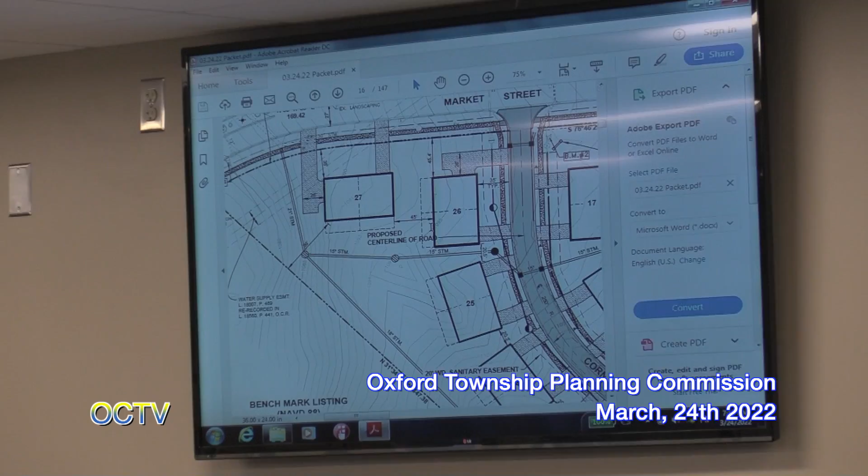Now if it's a patio, that'd be different, because a patio is a landscape feature on the ground. But if it's a deck and it's in the air, depending on the elevation, didn't we discuss that this elevation might make this into a patio? And there shouldn't be a problem if it's a patio. That's what I recollect, and that's what I recall. I believe it was only this building, wasn't it?

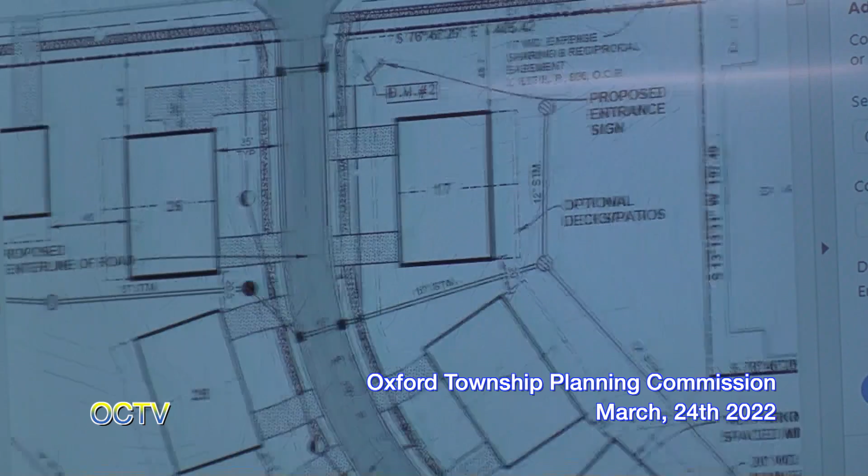Was there another one? Let me see, I just lost it, I can't remember. Buildings 17, 18, 19, 20, and 26. Right here, this part right here? Yeah, so in that case, the minimum spacing side to side is 20 feet.

So here, if you continued both decks following those lines, they would be within 20 feet, but it would be possible to do a partial deck or an angle. They might even angle a deck 45 degrees off at a corner or something like that and make it work.

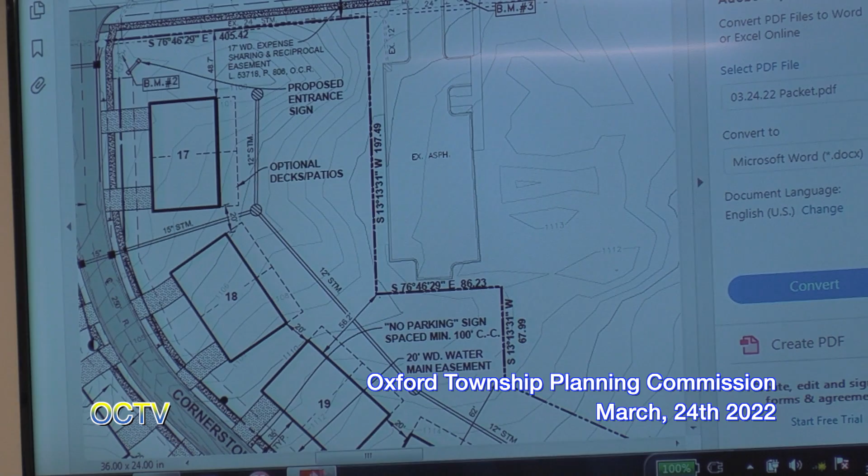I really think the only one that was really difficult was back when we looked at the other one - that was the biggest challenge. The others, right here at building 26 - I don't think we had problems with any others. I can try to check, but that's a good question.

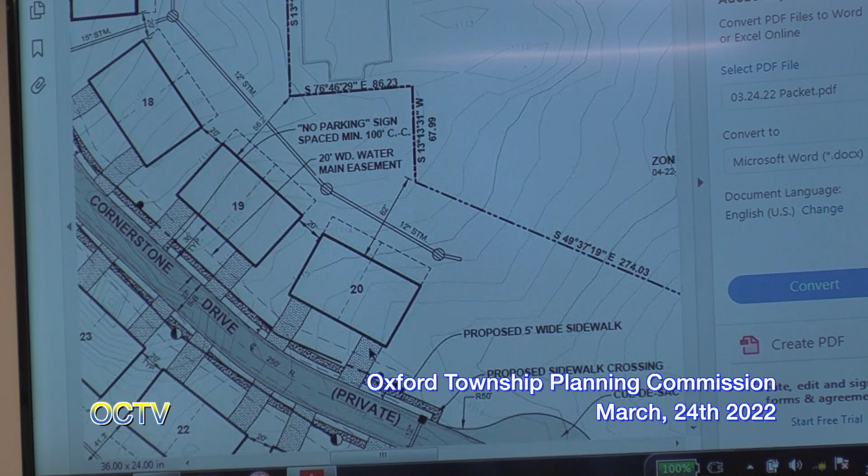Do you want me to scroll down? I'm trying on 20, yeah, like right here. Yep, the same issue there. All those, because they're coming around the inside radius, so they get smaller. They're 20 feet from building to building at the corners, but the decks might be 18 feet or a fraction off. They could shave part of that deck off and set it back a little bit - take 1 foot off one side and 1 foot off another building, and you're in line again.

And the dashed line you see there on the back of the units denotes a limited common element, which means you have exclusive right to use that space. You could put a deck or a patio or whatever in there, so it doesn't necessarily mean there will be a deck. We just wanted to bring it up for the planning commission, so the applicant knows some of them may be a little extra work.

I think it's important too, when you get out here at this cul-de-sac, all this eyebrow stuff, and the one that runs around on this side too, this will all just be removed later. And then the roadway has its own description with the easement down through there, if I remember correctly. So the roadway, which is the continuation of the road going this way, then these eyebrows will just be taken out, and the buildings will loop back around, and the property swings back to Market Street, technically.

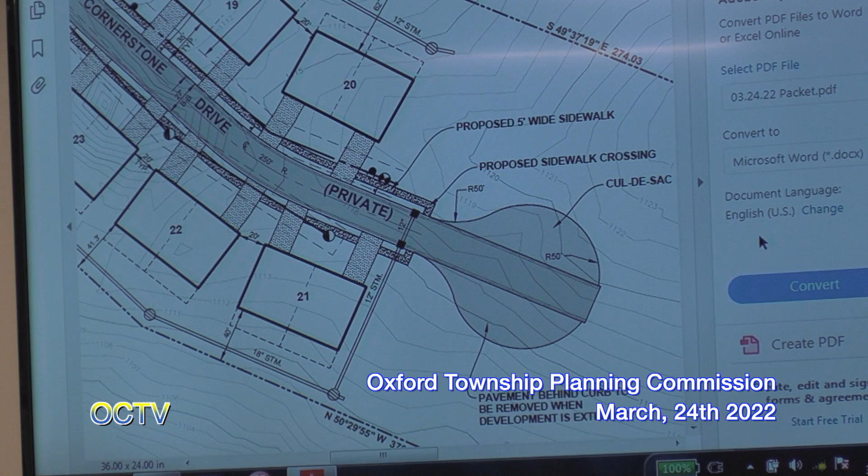But we don't need to pull that up tonight because that's not part of our review.

I just got to find it real quick, there's a lot of stuff. There's a 7:29 start time that Mr. Berger's trying to get home for, it sounds like, so I apologize, I'm trying to be good. Approximately 7:29, that's close enough. Drive time from here to home.

So obviously you have our final site plan review letter. We are recommending final site plan approval tonight. And again, as Zach had mentioned, this has been before you with regards to our portion of it, with regards to the grading, we see no issues with that. They are connecting to the public sanitary sewer system and extending it, same with the water and the storm sewer. They have agreements already in place to store their stormwater on the golf course property.

With regards to the pavements, we've talked about the cul-de-sac. The plans still show the concrete sidewalks being broken with the asphalt driveways, and we have both commented that we would like to see the concrete sidewalk continue through the driveways, so you don't go from asphalt to concrete to asphalt to concrete. But they can clean that up, that's a pretty easy fix.

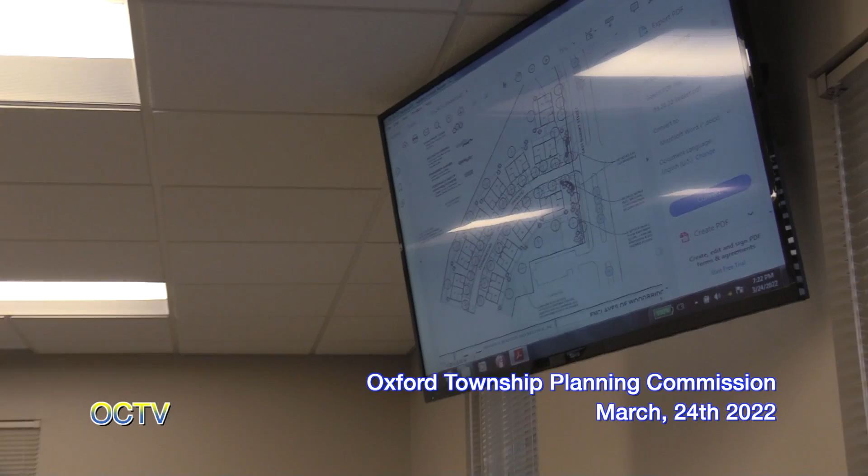For the cul-de-sac, instead of looping the sidewalk around it, there are crosswalks. So you get to the end and you can cross to the other side. He means right at the end of the roadway, where it turns into a cul-de-sac. If you go back to the site plan, they had some crosswalks so people could cross the street there, pretty close to the end of the road. So they'll be able to do it internally, and I would assume they'll keep those sidewalks in place in the future even if they extend the road, but they would have the option to take them out if they wanted.

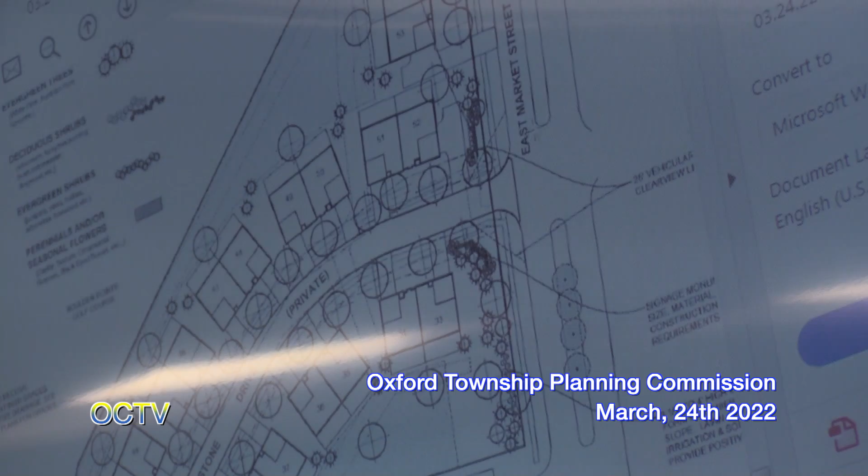Anything else? There's a safety path going across the entrance of the development, right, out here on Market Street? Yes, but that's because it's within the road right-of-way, since Market Street is a public road. This, I believe, is going to be all private road—see where it says private right there. But the safety path goes along both sides of the street. It actually goes right there, you can walk from Abbey Ridge down to Tim Hortons right now. It's right on the plan, right down through there.

I don't remember, is the safety path already in place there? Yes, it is. I haven't seen many people on that one though.

I'm always agonizing—well, I know when there was an event there were a lot of people on it, but I never pay attention. I'm not gonna go. Well, they can walk down to Tim Hortons, that's easy, it's walking back up that's hard for everybody, big hill there. I only go downhill on a bicycle, so I don't know, they have to drive me back up the hill.

Thank you, Mr. Sharp, appreciate your comments. Actually, when we talked about Susan Morrison and her letter, there was a lot to it. I don't know if we want to read all of it into the record, other than the fact that we do have a letter dated March 14th, 2022, regarding the final site plan approval for the condominium documents.

She addresses a lot of things from phases that started with phase 1, with a continuation to phase 2, and a lot of legal descriptions she talks about from page 1, paragraph 1, description of sheets to be added, replaced, and all that. I don't think we have to read every one of these individually, I just want people to take note. Mr. Sharp, do you want to make a comment real quick? I was just going to indicate that although this is a separate phase...